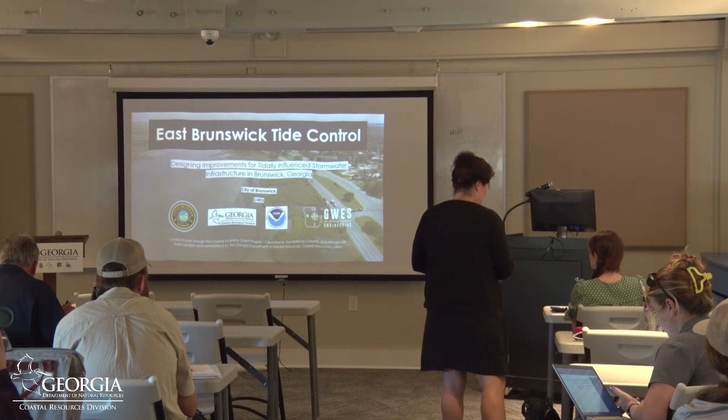Thank you all so much for coming today to our Brownbag presentation. My name is Kelly Hills, and I work here at DNR's Coastal Resources Division as part of our state's coastal management program. And we put on these brown bags as a way to allow people to come and present on projects that are relevant to coastal management, cultural and natural resource management, to just try to highlight some of the great work that's going on in the coastal region.

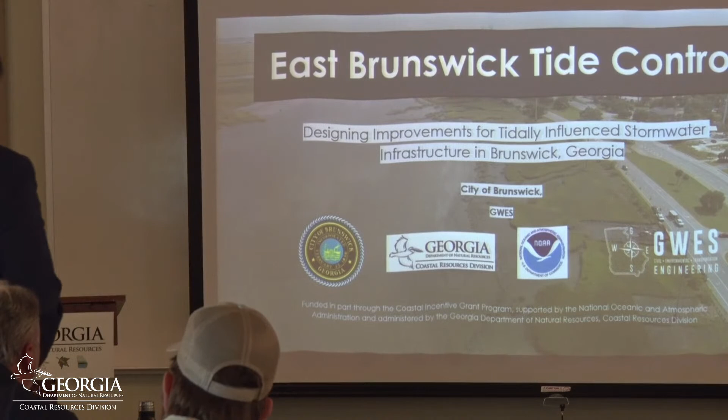All right. Thank you, Garrow. So as we go through the slides, we're going to give a little background about the project, some of the details of what we found, particularly some technical issues, some things that we found with the design aspects of it, the permitting aspects of it, and some of the future plans for the project. So if you have any questions as we go through, please raise your hand, stop me, let me know if I'm not making myself clear. All right. So, as I mentioned, just a little bit about what we're going to talk about this afternoon.

We'll talk a little bit about the project summary and the timeline, a few challenges that we had throughout the process, some of the background of the particular locations where the city wanted to implement tide control, some of the existing conditions, and then the project alternatives and the 90% plans. And we'll talk a little bit more about details, engineering aspects of that, as well as some acknowledgments and some things that the city is going to do after this.

So a little bit on the project summary. Obviously, some of the bad news, you've seen this scene from, I believe, Hurricane Irma, if I'm not mistaken. But a lot of coastal flooding here in this area, as many of you know. It may be difficult to see, but I'll just read it for us. So again, the problem is the tidal waters in stormwater outfalls, which reduces the upstream drainage capacity and causes potential flooding.

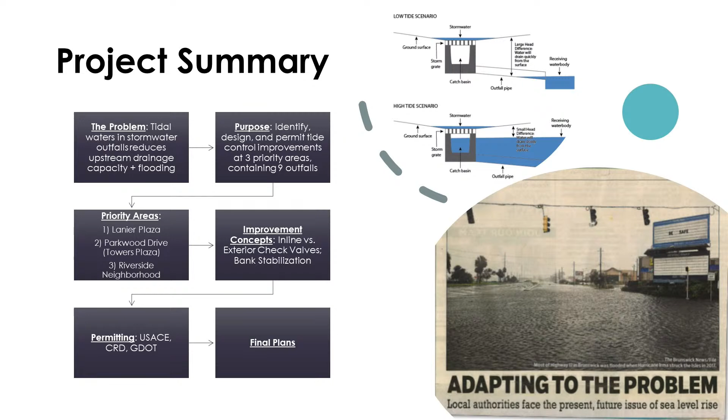Permitting, of course, was through CRD, the U.S. Army Corps of Engineers, as well as GDOT, and then we're developing the final plans. So some of the timeline aspects, just to give you some perspective about where we've been. Almost 2 years ago, we started the CIG project. We looked at conceptual improvements and an alternatives report shortly after, and then we had some coordination with other coastal communities later on in the process, as well as jurisdiction delineations, the permitting through CRD and the Corps of Engineers. You can see that was where the critical path was really taking us.

This past August, just last month, we finished up the final design, and throughout the process we've been looking at some community education and, of course, grant closeout here this month. Some of the project challenges that we've touched on a little bit, just to expound a little more: regulatory coordination has been a challenge for us, property owner coordination, other agency coordination with GDOT. Plan revisions, going back and making revisions throughout the process. And then scheduling delays and city reimbursements have always been a challenge for us as well.

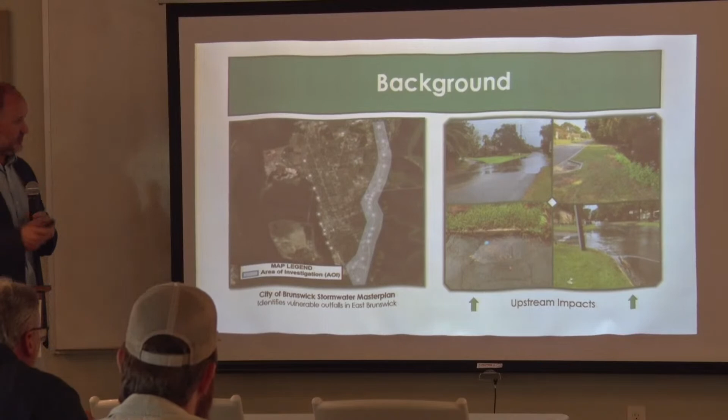So here's a little bit of background about the project. The City of Brunswick has a stormwater master plan, and this project identified several areas within the east side of Brunswick to improve for tidal control. And so, again, these communities here, you have an area over by Wildwood. This is the intersection of Macon and Talmadge. Again, just another indication of the type of problems that we're seeing throughout the city. When you have storm rain events and high tide conditions, it really poses a challenge for the east side of Brunswick.

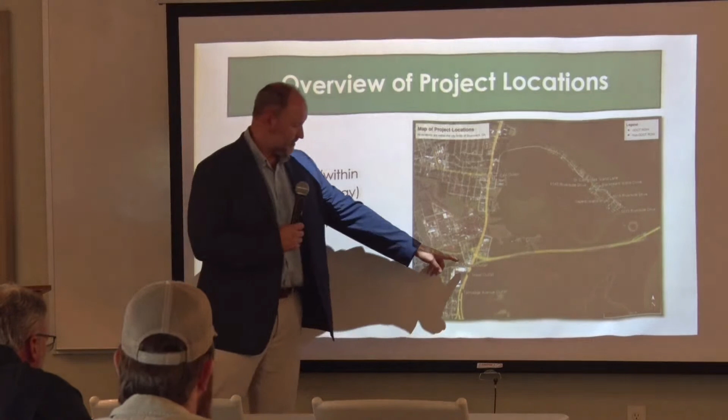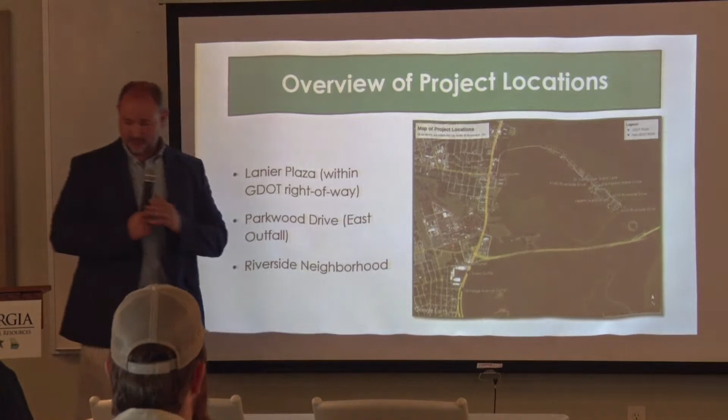Overall project locations. So as I mentioned, Lanier Plaza, within the GDOT right-of-way, we've got a few locations here, one of which is being constructed now, the Talmadge outfall, there at the outfall from Talmadge Avenue, I Street, and Cook Street, right here at the entryway onto the causeway. We have one location up at the end of Parkwood Drive, there at Towers Plaza. And then we identified 6 particular outfalls within the Riverside community.

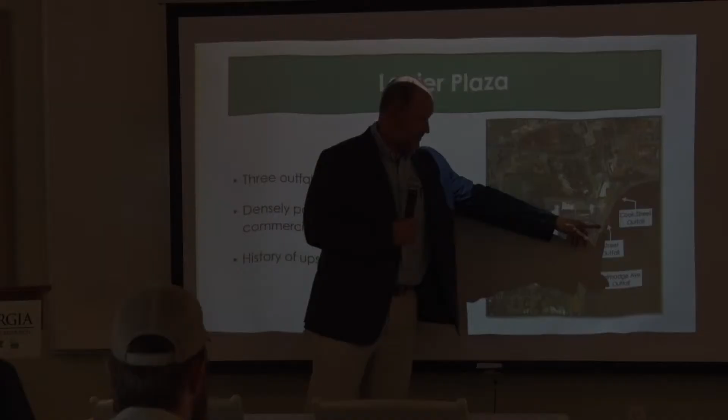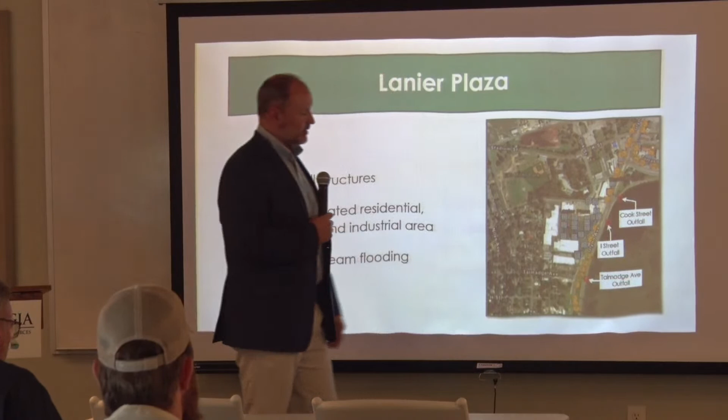Giving a little more detail to the project locations. Lanier Plaza, again, 3 outfalls. This area, as you know, is densely populated with residential, commercial, and industrial areas, and it has a history of upstream flooding. These 2, as the project was starting, did not have any tide control measures. The one here at Cook Street, we'll look at a few details as we go. It had a flap gate, but it was not functional. It did have a measure there, but it wasn't functioning at all to prevent tide from coming back in.

The Parkwood outfall is a double culvert outfall; its current tide gates are not functioning properly due to a lot of organics and a lot of sediment buildup in front. And this serves a lot of residential and commercial areas. This outfall here, as you're turning onto Parkwood, serves a vast majority of the stormwater needs for this area. So you can tell the importance of keeping tide control there.

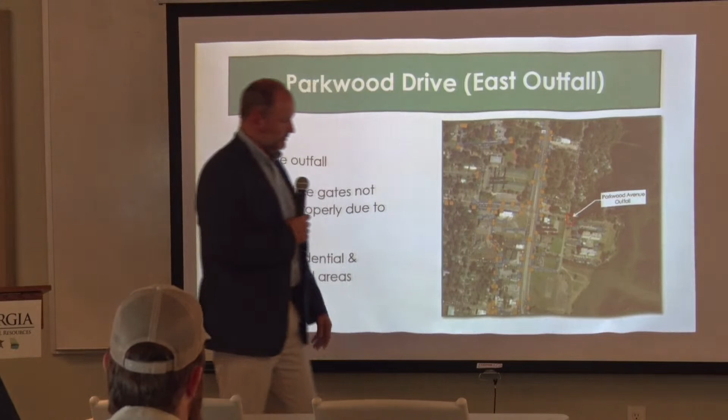Again, if anybody has any questions, please feel free. I don't mind.

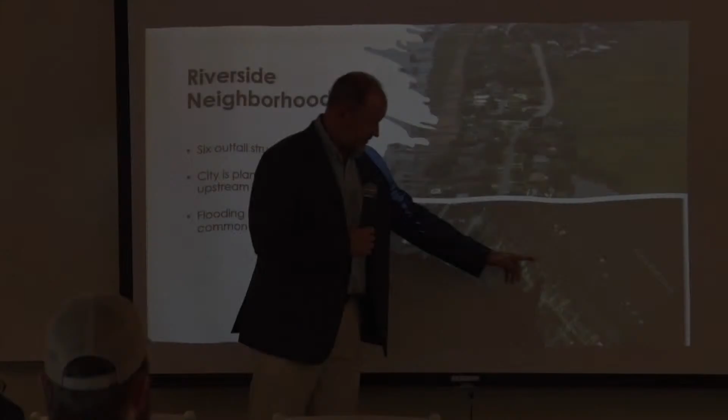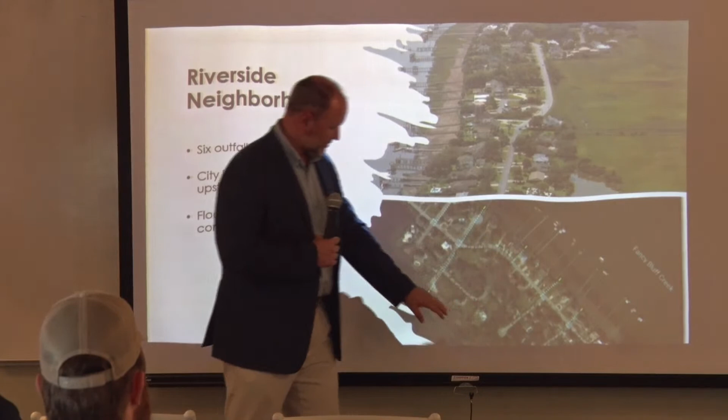All right, looking over in Riverside. 6 outfall structures. The city is planning for further upstream improvements. And again, as we know, flooding in this area is very, very common. Many of the outfalls that we looked at were just on the backside of properties, some down here on the southwestern corner. So it gives an indication of where the improvements are, right at the delineation line, right at the outskirts of the neighborhood.

All right, here's the bad news. You get a structure like this on Cook Street. So obviously it's a non-performing tide gate. Not just with the organic growths, but there's no seal on the existing tide gate. Even though it's installed, it's not functioning. It's not functioning from getting sediment back into the system through the ebb and flow of the tide, and of course it's not preventing any of that tide water from getting back into the system.

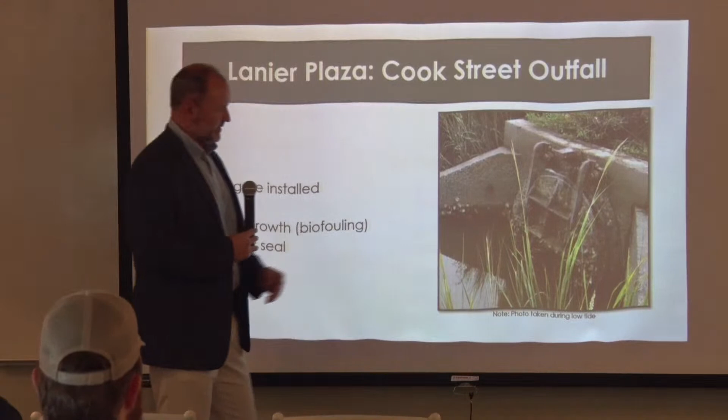Do you know how long that's been the case? Been there for years. I imagine long before I came here. But yeah, as you know, it's right there at the entryway on the on-ramp as you're coming northbound 17. This is just to the right as you're going onto the causeway. Been there, I would imagine, for 10 to 20 years.

All right, again, another outfall here from Lanier Plaza. Challenge here is there's no tide gate. So it's an open pipe end, again, an open area in front. Water levels, they flush with the bottom of the pipe during low tide events. When there's a storm event and you have a low tide situation, you do have the ability for stormwater to get out. But a lot of times the pipe's covered during high tide.

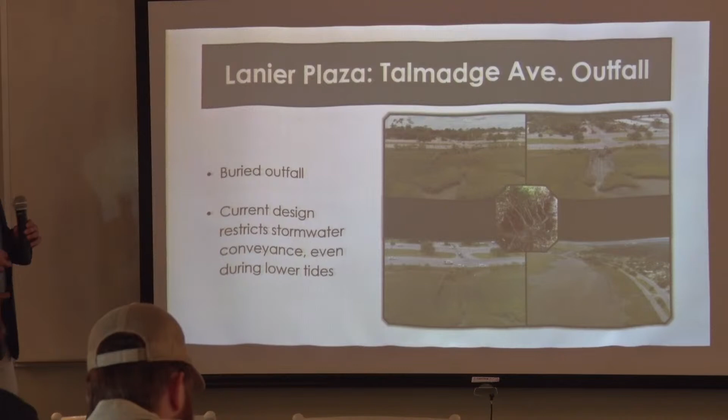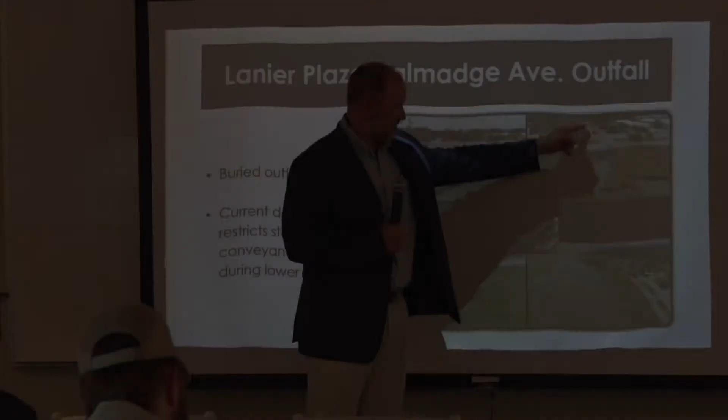This is the one that's under construction now. Some of the challenges that we saw before the project began was a buried outfall. This is a picture of what the outfall looked like. If you can't find it, that's right, because it was all buried. The outfall that came from Talmadge, right where the construction is happening now.

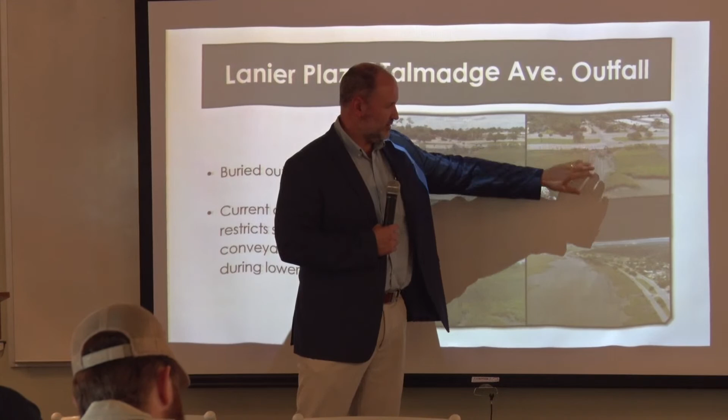This picture, this scenario of where the marsh and the vegetation were overcoming the existing outfall, that's where it was located, right there, just to the west of where the shoulder and the guardrail are. Again, just a scenario. You may remember what it used to look like before. Obviously, the improvements are being made today.

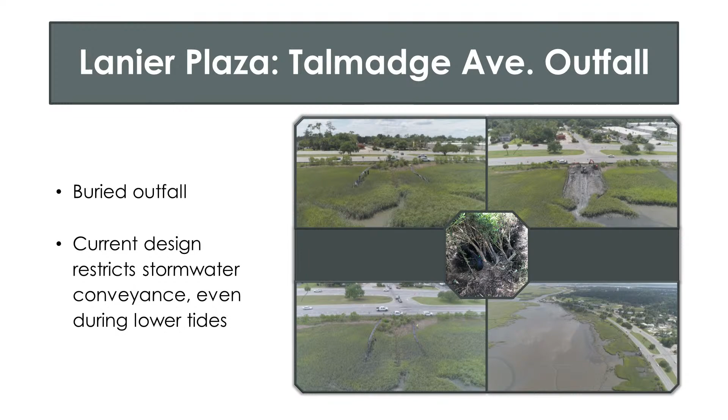Over in Parkwood, again, here's the bad news. The bad news is that you've got 2 non-functioning tide gates, and it's almost all the time submerged with tide water. This is the downstream condition, and this is where the location is. And I think it's important to note that this was taken during low tide. You can tell the low tide situation here, and this is just upstream of that. So it's practically inundated with the tide all the time.

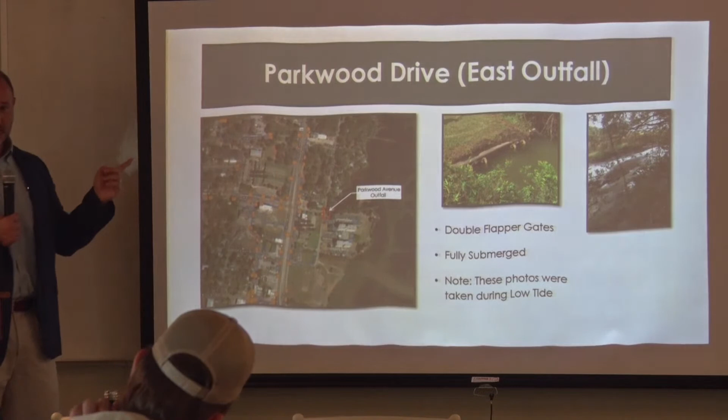It could have been that these systems were built where they had to maintain clearance over the pipes in order to provide positive drainage or positive downflow into the system. But this is very common, not just for the city, but for a lot of coastal communities, where you have stormwater outfalls that cannot outfall higher than the existing marsh where they're intended to go. And so a lot of times this is the situation that agencies find themselves in.

Yes. Not this one. We were talking a little bit before on the Cook Street outfall there to the causeway. I would imagine well over 20 years ago. 21 years ago. Thank you very much.

Usually these improvements, these situations that you find yourselves in, usually don't happen until major infrastructure road projects happen, right? So I would imagine whenever this portion of 17 was widened, whenever there's some significant road improvements, that outfall improvements were made simultaneously. All right.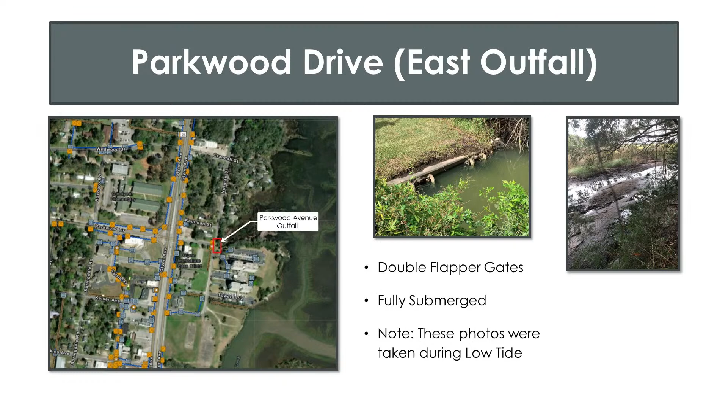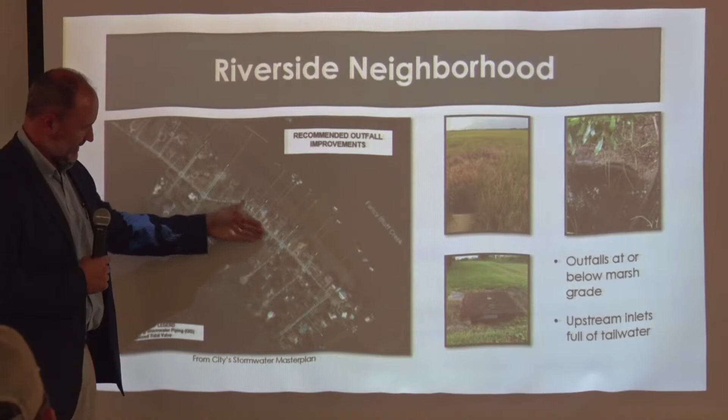And then in Riverside, similar situation where, again, buried outfalls, the outfall elevation's lower than the downstream marsh, infrastructure that's technically upstream. So you have an outfall here in the green. The blue lines are the stormwater infrastructure that goes back along the roadside. Whenever the tide comes back in, it continues to eat away at the infrastructure that's not intended to get that type of treatment.

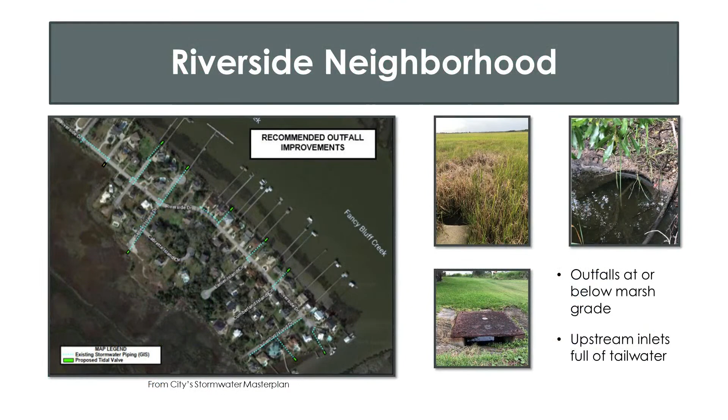All right, so let's look at some alternatives. How can you fix the problem that you have? Again, we've identified problems. The tide comes into the stormwater infrastructure. It drops sediment, goes back out. It prevents stormwater from exiting the downstream system. So what are your options? Here's the options that we considered throughout the project.

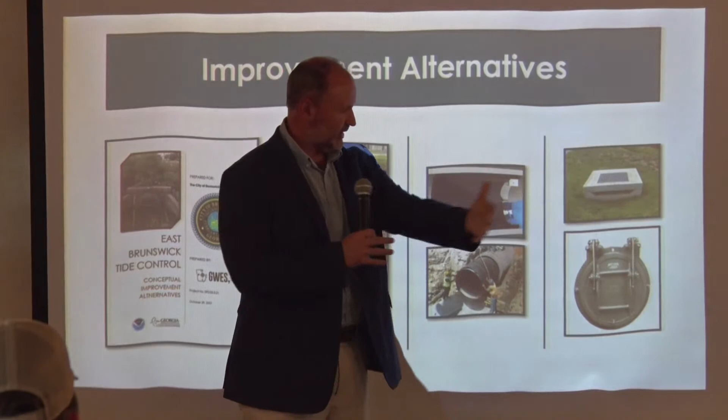Really what's called a spillover box, where this would be adjacent to the marsh, the jurisdictional area. Stormwater would come in from upstream and flow and bubble out and spill over into the marsh. We looked at, again, going back to more conventional approaches to stormwater control and tide control, where you have more circular flap gates.

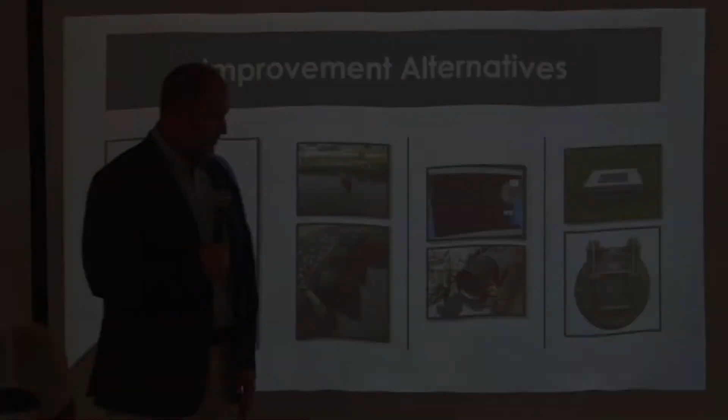Some more recent technology that we've seen in this community and also in other coastal communities is, again, more of a sanitary type of approach, sanitary sewer approach, where you're installing inside the stormwater system a backflow preventer, or what's called an inline check valve. Again, a very good approach for preventing the backwater, or the tide water in this particular case, from getting back into the upstream system. And then the other approach that we've seen, very commonly over the last several years in this community, are the exterior Tideflex valves. So a very common approach.

So these were the conditions, these were sort of the options and alternatives that we investigated and reviewed. All right, so we're going to go through a little bit of the 90% plans, where we were at the time of permitting, just a handful of months ago. So we generated the 90% plans for feedback from the city of Brunswick. And then the following slides show some of the examples of what we saw, particularly at each location, okay? Some of the engineering drawings.

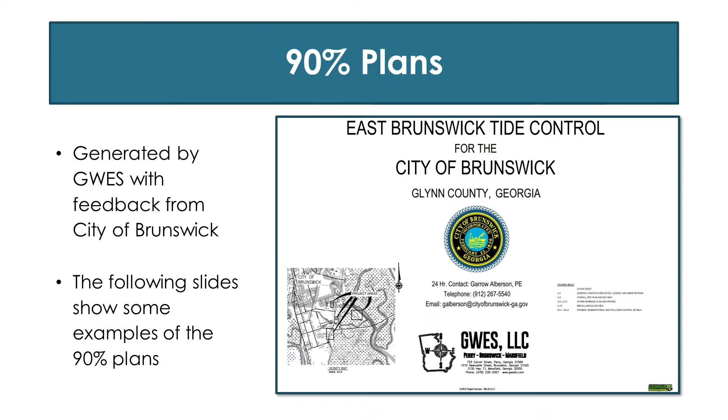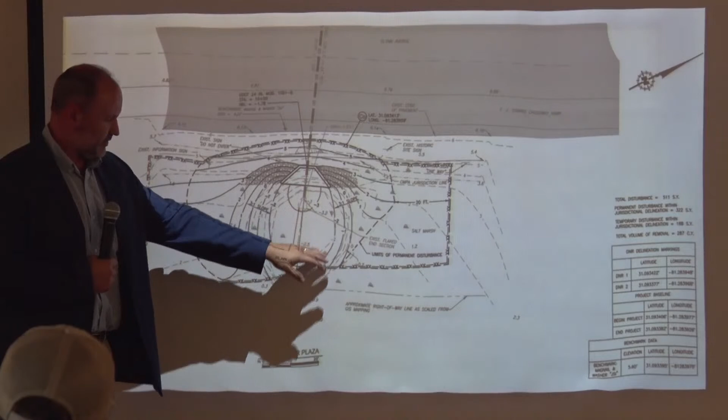This is the Lanier Plaza outfall. Again, you may recall it just had one pipe coming in and didn't have anything on the exterior. And so the solution here was a new head wall to help with the erosion around the end of the pipe, some grading around the outfall, as well as a new Tideflex exterior tide gate.

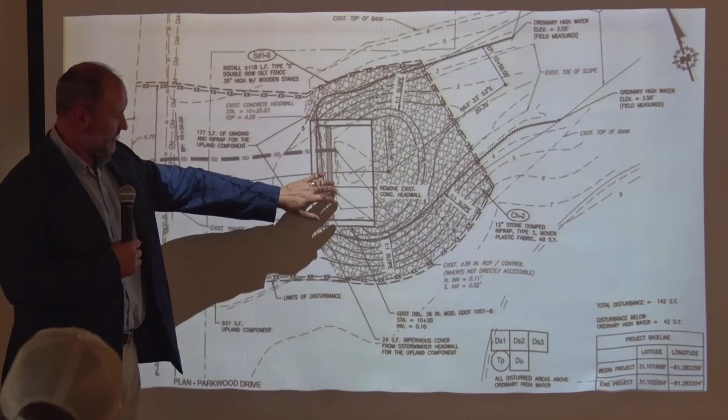This here is Parkwood. This is a double head wall, double outfall pipe. Again, with this particular situation, we're having to install a new head wall with Tideflex valves on the exterior, and then a little bit more of some improvements, some more clearing and bank stabilization around the ends of the head wall. Going further would require a tremendous amount of sediment removal and a tremendous amount of permitting. And so just in order to achieve the goals of the project, preventing tidewater from getting back into the storm sewer system, the decision was made just to make the improvements here at the end of the outfall.

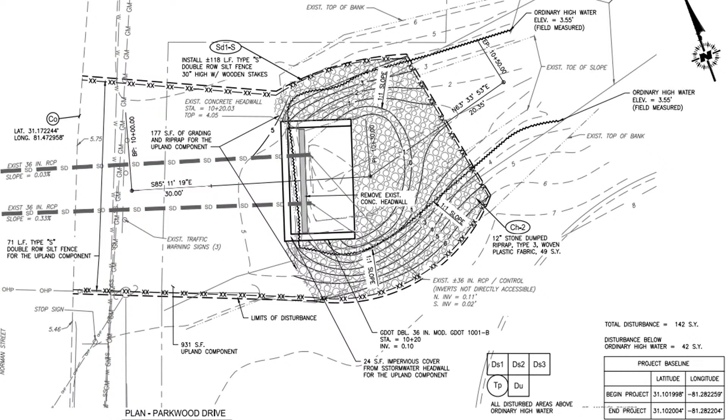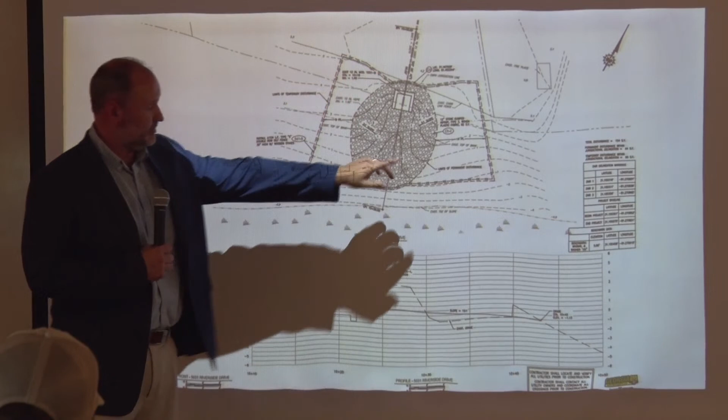And then this is one location at the end of Riverside, 5031, where you've got a small pipe, a 12-inch pipe, outfalling between two residences, and again, bank stabilization and some downstream improvements out to the outfall. And again, this is a profile view, kind of a front view of the new head wall and the exterior Tideflex valve.

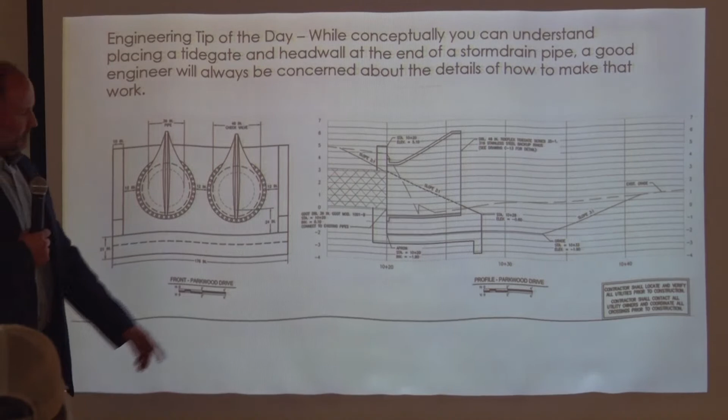All right. So here's your engineering tip of the day. Your engineering tip of the day is that while conceptually you can understand placing a tide gate and a head wall at the end of a storm sewer pipe or storm drain pipe, a good engineer will always be concerned about the details of how to make that work. So here's the process we went through. This is the Parkwood outfall that we looked at just a moment ago. Again, older head wall, not really doing anything with the storm sewer system, just focusing on what happens in and around the outfall. We surveyed the property and found out, well, here's where your inverts were. Your inverts were practically at zero, at sea level. A lot of your ground is higher than that.

One of the challenges that we saw in designing a new head wall and a new tide gate is elevations, right? So conceptually, you can think all you've got to do is just put in a head wall and put in a tide gate. Doesn't always work that easily. When you get into the design plans, you actually have to realize that these tide gates, these Tideflex valves, while they're very common, they don't match the size of the upstream storm sewer pipe. In this particular case, the upstream storm sewer pipe was a 36-inch interior diameter, so 3 feet of inside diameter. You can't just go to Tideflex and say, hey, I want a 36-inch tide gate.

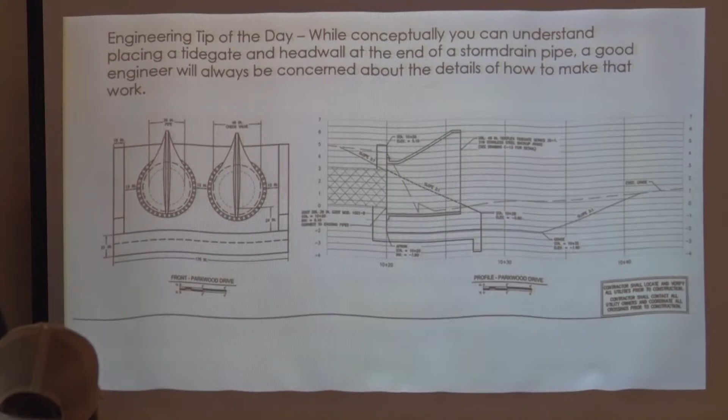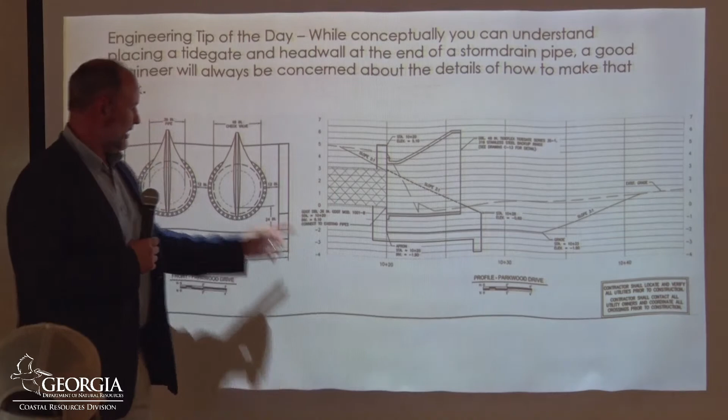And why is that? Well, the problem is that these 36-inch tide gates actually have an interior diameter of 36 inches. And so when you put in an interior diameter of 36 inches matching up with a 36-inch pipe, you have these bolt holes around it. They don't have anything to grab to. They don't have any head wall, any concrete to match to and anchor to. And so what you have to do is actually design a tide gate much larger than both the interior and exterior wall of the pipe. Okay, so that's a little bit of a tip for the day.

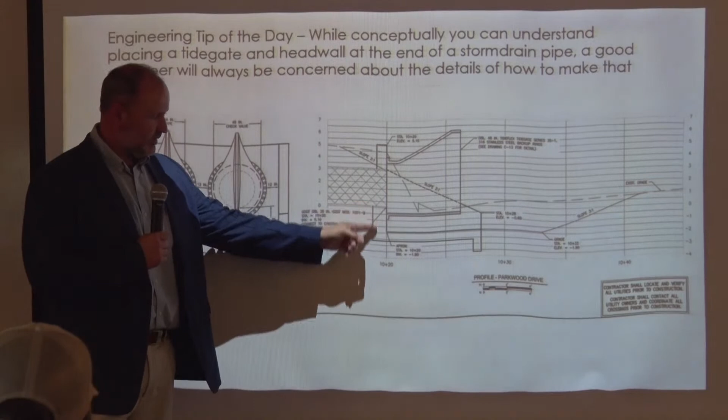In addition to that, the apron, the head wall apron. You can't just go to your standard GDOT spec book and say, I want a head wall that's flush with the invert of the pipe. You actually have to drop the head wall elevation down so that the flange on the outside of this tide gate can actually fit onto the head wall.

So you have to specially design these aprons to be lower than the standard detail. Because if not, the contractor is not going to be able to install it. He's actually going to install the head wall higher than the invert, which is where the bottom of the pipe is. All right, so those are a few of the challenges that we found.

Conceptually, again, you put a tide gate, put a head wall at the end of the pipe. Going through the details, you have to think about the details of the head wall, the details of the tide gate, and how do we make that work. So those are a few of the things that we went through. Any questions about that? It's okay. All right, moving on.

Permitting and regulatory coordination. All right, so we had some GDOT challenges, right? So we had to go through the GDOT permitting process because we had 3 outfalls along GDOT right-of-way. So we dealt with encroachment permits, assistance with CMPA permitting, and then paving of Highway 17. Right, so there are some challenges about timing with that.

U.S. Army Corps of Engineers, again, nationwide permitting. One of the many, but primary challenges that we faced with the Corps of Engineers was, again, just a long delayed process, very little response from the Savannah District. And then CRD, of course, we had great coordination with CRD.

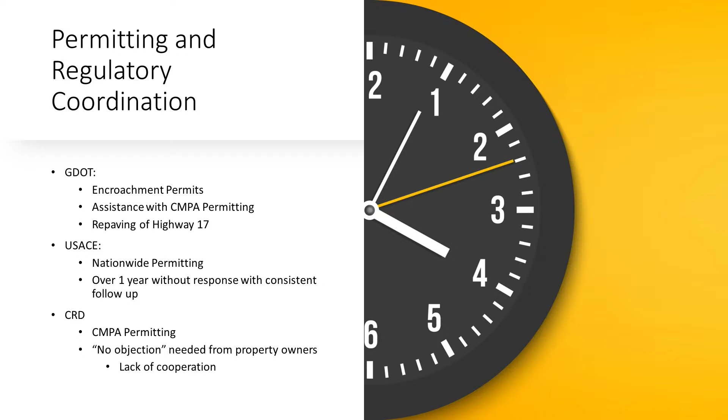Again, final plans, as you know, with the improvements that are happening now currently, but working back from that, we have the Talmadge outfall improvements, which is an upstream drainage project unrelated to this particular project that was making stormwater improvements up Macon, up Talmadge, adding curb and gutter, those sort of things, further upstream, increasing capacity there. And so the Talmadge Avenue outfall expedited to coincide with the upstream drainage improvements ahead of the Highway 17 paving.

Right, so the paving's occurring right now on Highway 17. So this project had to coordinate with that paving project as well as the upstream drainage improvement project. And then where we're at right now, the remaining two outfalls on Lanier Plaza, just to the north of this, as well as on Cook Street. The Parkwood Drive outfalls, and then 6 of the 9 outfalls that we identified in Riverside. 1, again, could not be located, 2, the property owner could not be located, and then 2 of them were not approving of the project.

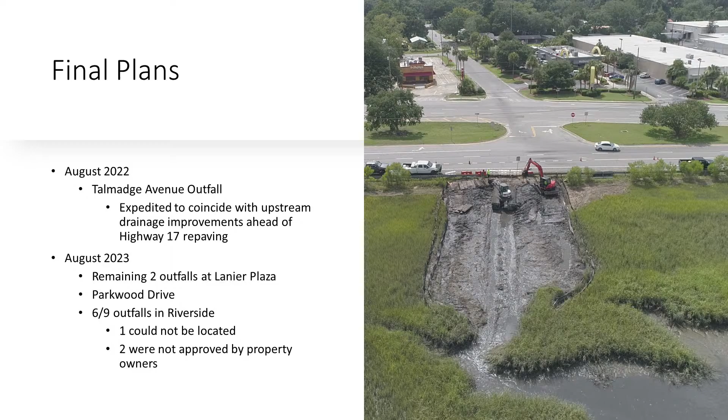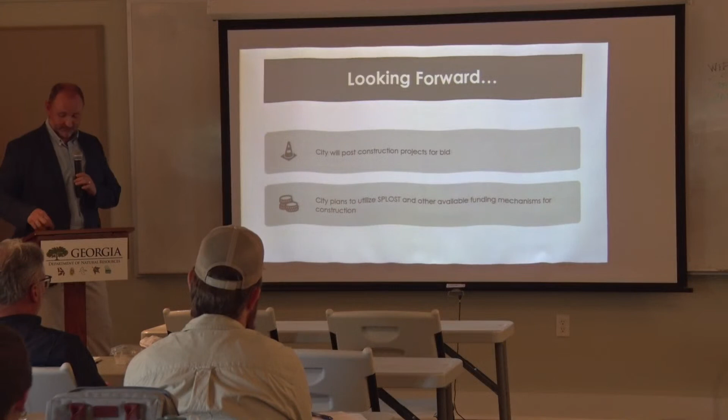Again, looking ahead, the city intends to post this for construction in the near future. And also, the city plans to utilize SPLOST and other available funding mechanisms for construction. We'd like to give special thanks to these agencies, to CRD, NOAA, and GDOT, as well as the Army Corps of Engineers. We've been coordinating with Chatham County and the City of St. Mary's on some of their technologies and some of the things that they've been implementing, and gotten some input from them and some coordination. Very good help. And that's all. We can take some questions.

Yes, sir, in front. The Army Corps of Engineers, their nationwide permit would take over a year to respond. We know. Outside of physically going to Savannah, knocking on the door, it was emails, phone calls. There was some turnover. There's always turnover there. I get it. It was just no coordination. It used to not be that way. I understand.

Yes, ma'am. Jill. Do you guys have an existing, or will you have a new maintenance plan for these moving forward? Yes, we will have a maintenance plan going forward, and that's one of the benefits to the head wall on there. He showed a couple of the existing ones are so easily silted in, and I think this head wall will help us keep those ends open and clean and keep these pipes flowing. So yes, they will all fall under our maintenance program.

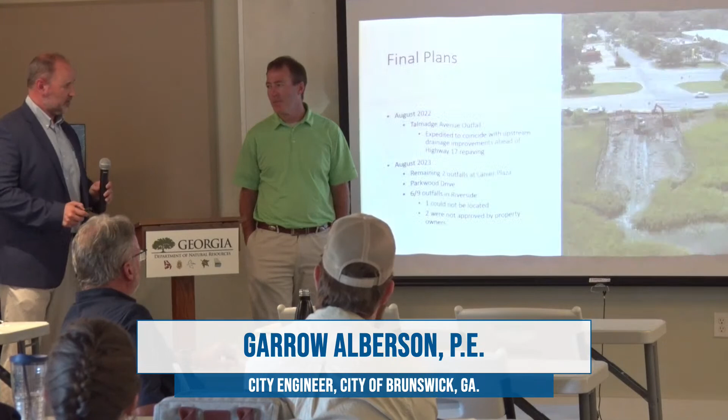I know Chatham County, when they did a lot of their projects, they also developed a maintenance plan along with the... Let me talk about maintenance for just a moment. Thank you, Kara. We were very concerned about maintenance, not just on the head wall design, but on the type of tide gate that we looked at and finally designed. So let's go back to the alternatives. I think it's very helpful for everyone to understand the risk and the challenges involved in these two things.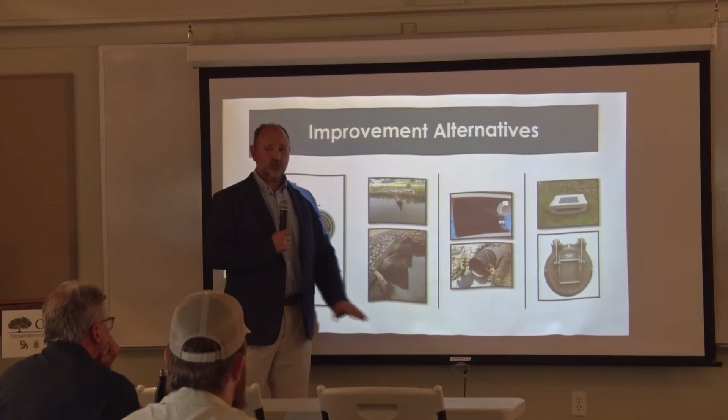So again, these two options we weren't very interested in. This has not shown to be very helpful, very maintainable over time. This, you're still having a situation where the storm sewer infrastructure is all underwater, constantly underwater. You have to pump out the water in order to clean it. So we get into these two options. Again, good technologies intended to hold the tide back, if you will.

However, with this particular option, where you're slipping a tide gate into the pipe, right? Let's see if I can get it right here. This end here, or the bottom of the pipe, or the tide gate here, this has to always be able to open up when stormwater is coming out, right? So if you have the tide here, it won't be able to open up. But when the tide drops, it can flap up and open up. Now, that's one of the challenges.

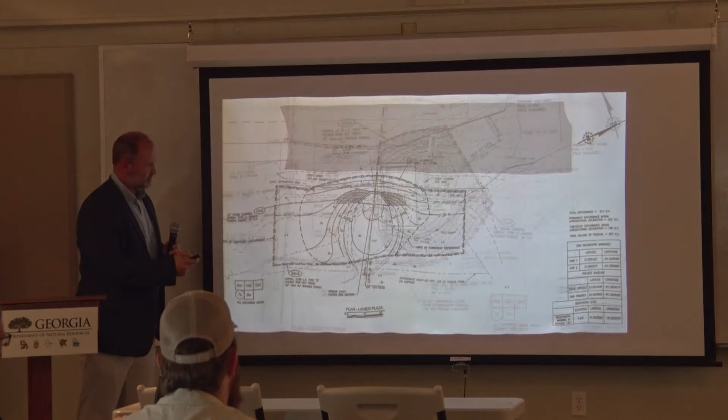The second challenge that you might not always think about, go ahead to the slide here, excuse me. If you're installing a slip-in tide gate in this location rather than an exterior one, what often happens, to Garrow's point about maintenance, is that you're going to get sediment buildup at the end of this pipe, right at the bottom of the pipe. And so if you get sediment buildup from the tide in front of this,

what the city is banking on is essentially the vendor saying, yeah, that tide gate's going to open up and clean itself out when you've got sediment on the bottom of it. That's not a risk that the city wants to take, because then they're pretty much having to maintain this outfall constantly in order to ensure that the flap gate's going to open up.

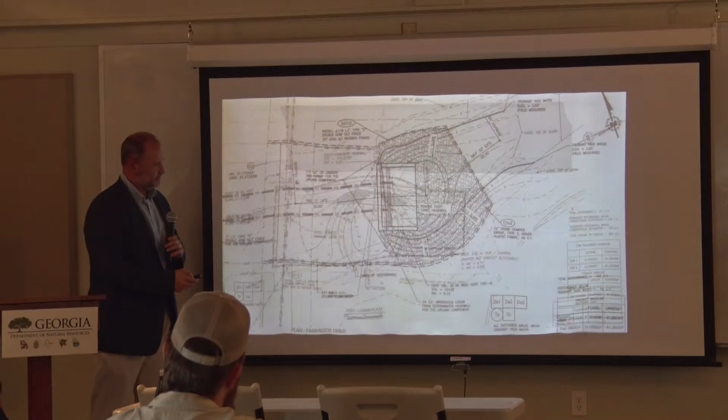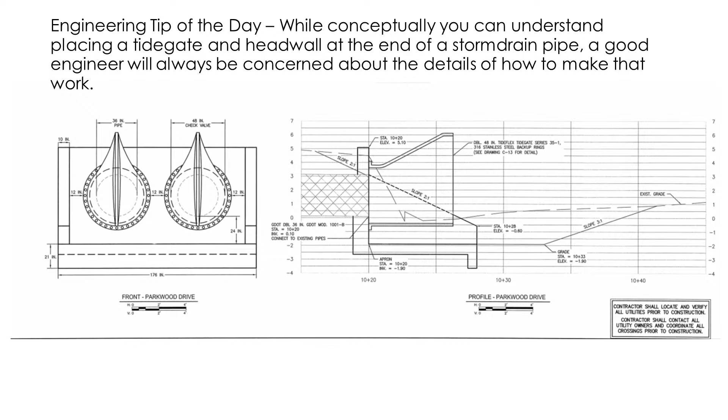And so alternatively, you look at these exterior gates, even when sediment is built up here, and we can lower this down not just for the flange, for the tide gate, but also for sediment deposits. But when sediment builds up, even if it's flush with the ground, stormwater can still evacuate. It can still get out through the top of the system. And go back to the other slide. It can still exit out right here at the top.

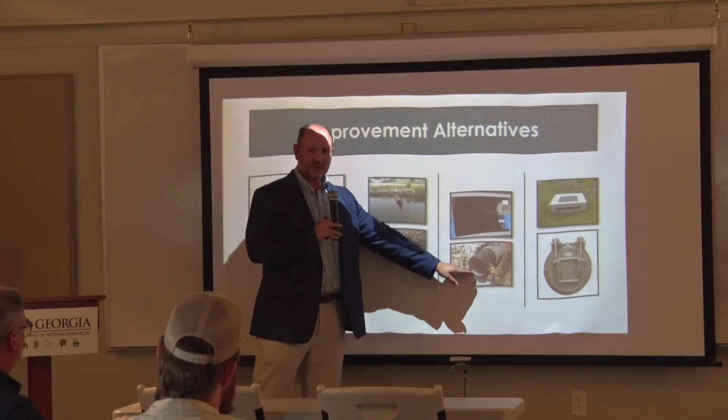Stormwater still comes out even though this could be closed by sediment, debris, or any type of obstruction in the front. With an inline check valve, we haven't seen it operate that way, where it can still open up when there's debris and sediment at the bottom. When there's debris and sediment at the bottom of these exterior valves, the flange can open up at the top to still allow some stormwater to get out.

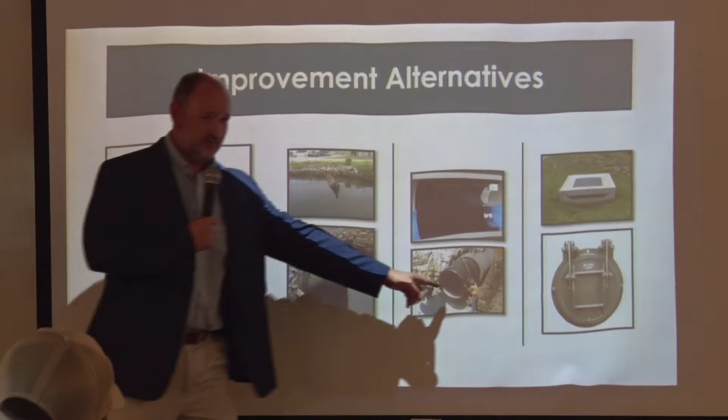Yes, ma'am. So it opens part of it. Yes, it's an exterior type of, it's like a big elongated flange that opens up, like a duckbill shape. Can you manually do that too? Yes, you can put somebody in the water with a crowbar and open this up if you wanted to. I've done that. With this one? Yeah, yeah.

It reduces the amount of maintenance that occurs at the outfall. When you have these tide gates in, it doesn't eliminate the maintenance, obviously, but it can help with a factor of safety on the sediment buildup and still allow some stormwater to get out by the opening of the remaining part of the duckbill shaped tide gate. That was why we went with this style. Again, in a situation where the invert of the pipe was much higher than the ground underneath it, this could certainly be an option to consider. It's less exposed to the elements, but in this particular

But yes, they can attach to the bottom, they can attach to the apron, they can attach to the concrete. In my experience, they're going to attach to the concrete and to the riprap before they attach to the tide gate. Doesn't mean that they can't, but you're still going to get some growth there potentially.

Anything else? Yes, ma'am. So for large debris, the top can still come down to the large debris if it's just in the way? Correct. Very easily, right? Correct. Debris from upstream can still get trapped here. It can get trapped here. It's less likely to get trapped here, and it's not going anywhere here. It's less likely that upstream debris can get trapped in this scenario as opposed to these others.

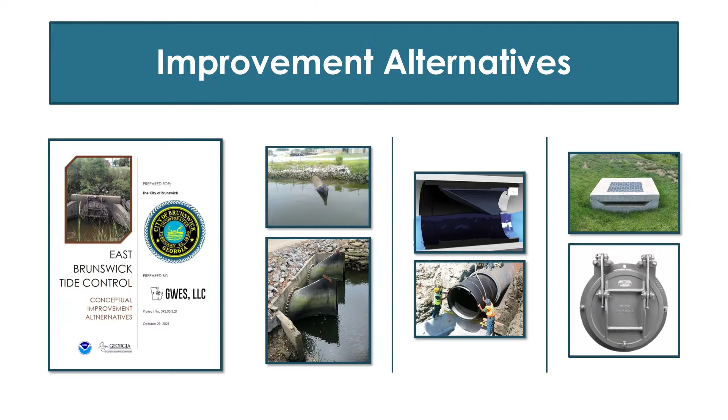Yeah. But again, with debris caught up in the front here, with these other situations, stormwater still doesn't have the possibility of exiting. And that's why the city wanted to investigate these further and put those into the design.